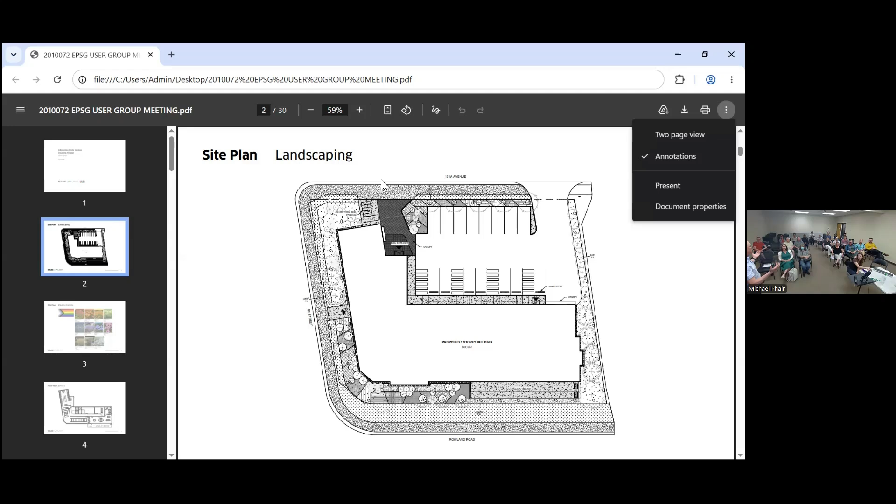If you complete control, right, and maybe I'll introduce Tegan from our office. For those that don't know me, Jonathan Rockliff, I'm with DIALOG, I'm a registered architect, and I've got Tegan, designer today. She's been heavily involved in producing a lot of the design work, and I've got Ty here as well, who's a partner in charge for the project. So I think between the three of us, we can answer probably any questions you might have.

So what we're looking at first is the current site plan, which has the footprint of the building. As people know, we've got roads on three sides. It's kind of a unique site that way.

We did find out recently that we fall within the corridors area, which has some additional landscaping requirements that we're kind of stick handling right now with the city. The idea is, do we have a colored landscape plan coming up? We don't have a colored plan, but we have some images of the planting scheme.

Quickly, in terms of the site plan, the building is kind of this L shape. We've got the main entrance facing 101A Avenue. We've got limited parking, but some parking to the north. And I think everybody knows, and we'll see it later in the design, the site is quite sloped.

So as you go from the north to the south, how many meters difference? 2 meters, I think, a little. So that's 7 feet or so from front to back. So let's go to the next slide.

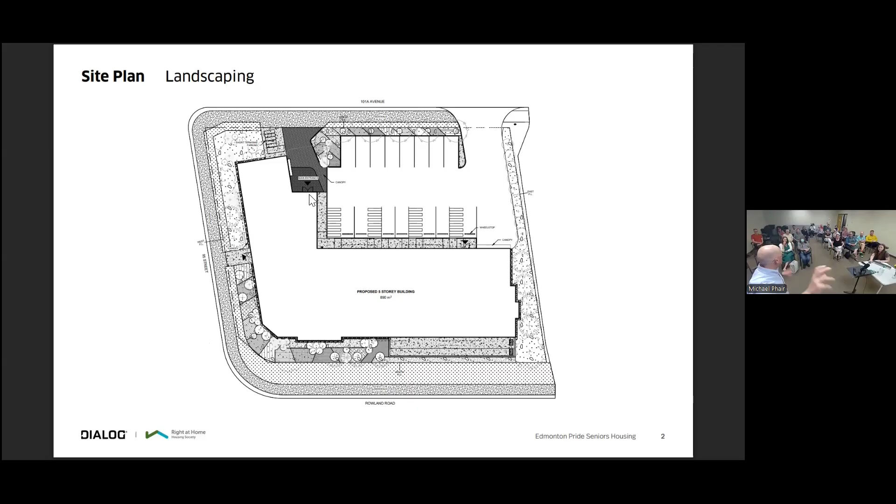I'll point, and maybe you can hover your finger for the people online, but we've got the main entrance into the building, a bit of an entrance plaza where we thought we'd get some seating in there and some planting. We've got some bicycle parking, which is a requirement by the city, adjacent to the front entrance.

As you come around the building, it's hard to see, but there's bigger trees and bushes, and some landscape buffer between the streets and the building of different shapes and sizes. We've got a fire exit here along 95th Street, and it'll come out probably in a drawing later, but there's an outdoor amenity area just to the south in the lower level, to the southeast of the property.

Will the development permit dictate the landscaping? The zoning dictates the landscaping, so there's a requirement for trees and number of trees, but they won't say exactly what needs to be planted. I don't believe they indicate the species, but they might say like this many coniferous trees or deciduous trees.

Our landscape plan that will be submitted to the city as part of the development permit will be our opportunity to propose how many of what will be planted where, and then that becomes what we get the permit on, so they'll come back and look for it. We do it all the time.

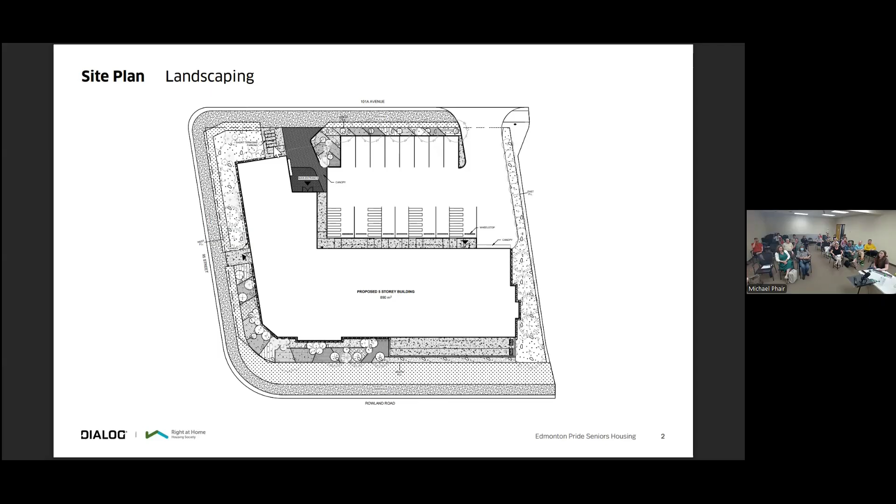So that's the building footprint and the site plan, and we talked about the landscaping.

We're calling this the lower level, not the basement, because of the slope of the site we have a walkout basement. For the most part everything's underground, except the area we're calling the common amenity area, which is essentially a big multi-purpose room with a kitchenette, some bathrooms, storage, and a sizable exterior space directly accessible from it. It faces south, so lots of sun.

We're aware it's going to be adjacent to a busy road, so we've thought about fencing for security, but also privacy.

Is that your bike parking? Yes, this space up here is dedicated to bike parking. You can see all the little stalls required for smaller bikes and bigger bikes, and this is in order to meet the zoning requirements.

Common on each floor is two elevators and a bit of a lobby space, and you'll see more about how that works as you get above the main floor. We've got a large storage area over here, some mechanical and electrical spaces in the middle, and a couple of exit stairs.

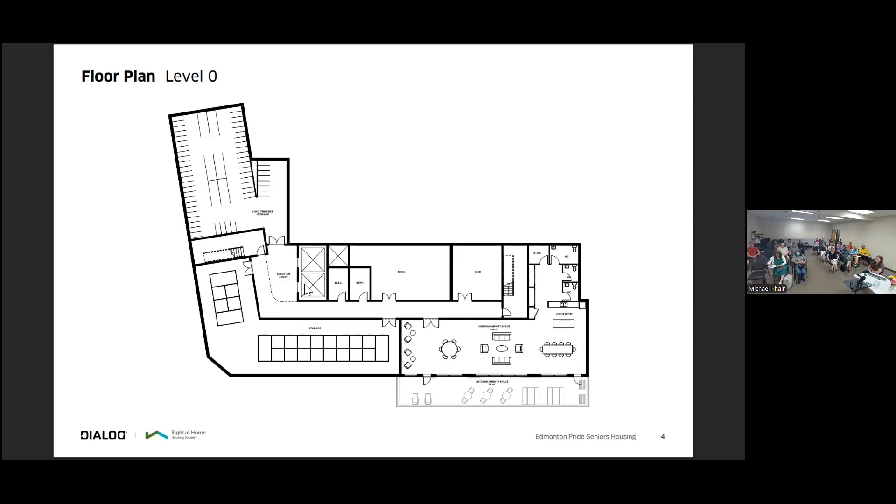All right, next level. So this is... did someone online have a question?

How does one see the slides? I'm not seeing them at all. Oh, it's...

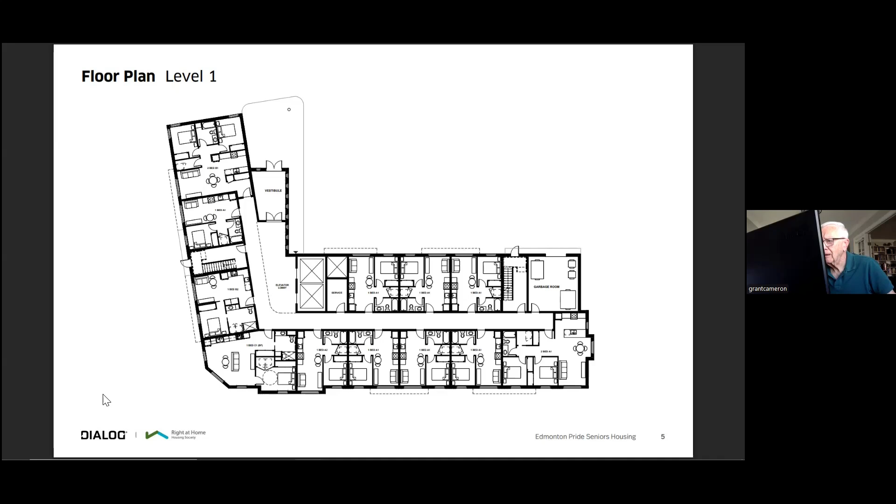Anyone else online? Yeah, we can see them, they're on the screen. If you go to speaker view, you'll be able to see it, then go full screen. Okay, where is that? It looks like a little stack of nine squares. Speaker view, are you seeing all of us right now? I'm seeing the whole room. At least I was. You should, but they shared this screen. Yeah.

All right, well, maybe I'll keep going while you're figuring out your tech, if that's okay. Okay.

I don't know if we want to share these drawings after the meeting, but I guess we're okay with that. I think we're fine sharing some generic ones as long as everyone understands we still haven't made it through development permit and building permit, so there may be changes as they identify issues. They're your guys' kind of drawings, but just so we understand, we may have to make tweaks along the way. It'll give you the general idea of what we're aiming for.

Here we've got the main floor, and the main entrance coming in from the north. There's a nice size canopy over the front entrance for shelter, and we've pretty much used every square possible inch of the space available to create suites, mostly suites. Maybe just hover your mouse.

One of the requirements from the city was a garbage room, not exterior garbage. So in the northeast part of the building, we've got a garbage room. On garbage day, the truck will pull up, open the door, pull the bins out, empty them, put them back in. I think Right at Home is actually happy about that, from a safety, security, maintenance point of view as well.

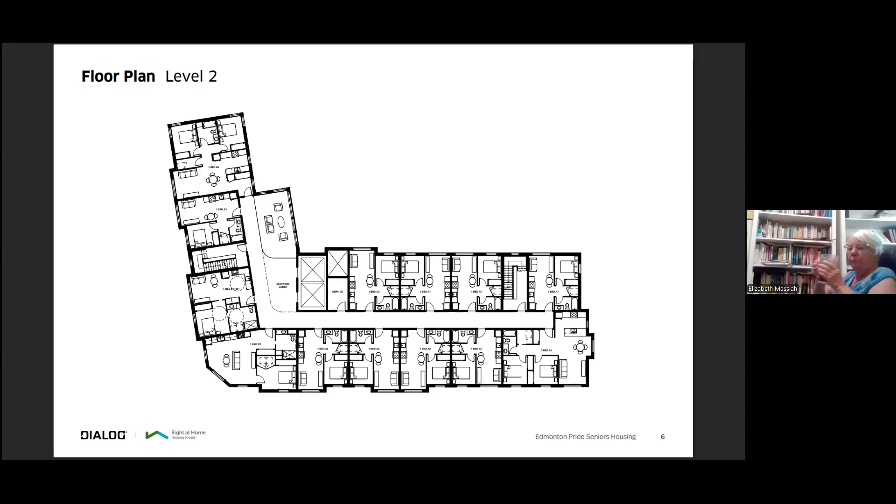On the upper floors, the elevators are a place where people come and go in and out of the building. The lounge area has a nice adjacency to that space, so it'll be an interesting, active space, with windows bringing natural light not just to the lounge but into the core of the building where the elevators are.

When we look at the exterior of the building, you'll see we've extended out portions of it. That provides a bit more space for the suites, and in some cases we needed that extra space, but it also helps create some visual interest on the exterior of the building.

So do they have balconies? No balconies, no.

So I guess we can probably go to the exterior. Jonathan, the size of the different units, how big are they, the one bedroom and the two bedroom? We'll hit that on an upcoming slide.

On the topic of balconies, one of the things we considered in this design was larger lobby areas and community spaces, encouraging people to get out of their suites where we've got those sitting spaces.

Balconies, especially if anybody's watched the weather lately, can be not a fantastic space to use. Summer we have all this rain, winter it snows, it's cold. So creating these shared spaces, whether on every floor or the main one in the basement, means it's usable 365 days a year, no matter the weather.

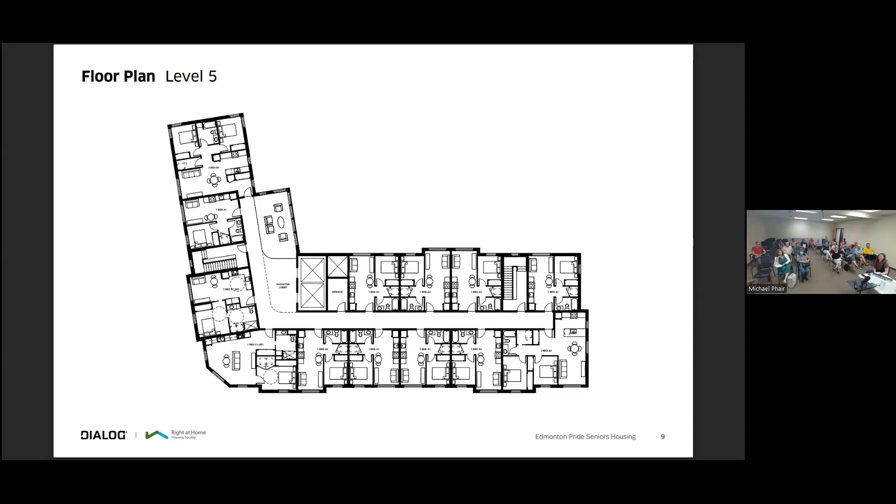For those challenged converting meters squared to feet squared, if you add a zero on the end you get pretty close. So this would be about 400 square feet for this suite. That is one of the smaller 1-bedrooms. This one's a little bit bigger because it's got that bumping out on the exterior to add a little bit more space to the living area.

Because we're getting money from the government, there's a requirement in the building code to provide adaptable dwelling units, kind of like barrier-free suites, but they don't have to be built barrier-free, they just have to have that ability to become barrier-free if needed. So we do have 7 of them in the building.

This would be an example of one of them, showing those dotted circles, which are the turning radius of a wheelchair, for reference and size. I think that's 1,700 millimeters - just over, no, just under 6 feet. It gets bigger every year, the radius we have to provide. It used to be 5 feet, now it's more. There is laundry facilities in every suite.

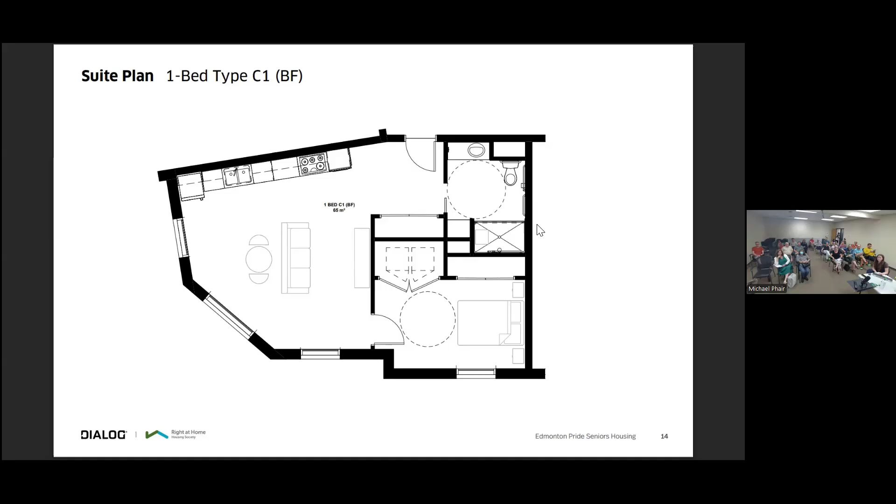And what was the square footage of this one? This one is 65 meters squared, so approximately 650, 675 square feet. And yeah, there's a nice big closet as you come in, right there. Same layout.

Here's our two-bedroom. It's in the southeast part of the building, so it benefits from two exterior walls and lots of light. This one has a storage room where we would put the stacked washer dryer.

Do any of those windows open? Yes, yes, albeit the building code limits it to 4 inches of actual opening space. They could be sliders, right? They could be sliders, they could be swinging, but can't have more than 4 inches of open space. You don't want anyone to fall out. Yeah, it's kind of like that.

We are putting air conditioning in the building though. Oh, perfect, so you're not reliant on your windows for cool air. That's nice, I was like, I don't think you're super worried. That would be if you could climb out that window later.

Air conditioning in the building. In the suites as well, or just the hallways and common areas? We are still value engineering the mechanical, but it will be. We are working towards making it nicely acclimatized for folks.

Excellent. Sorry, and what's the square footage on this one? This is 72, so about 720. And how many of those units are we going to have? We have 5.

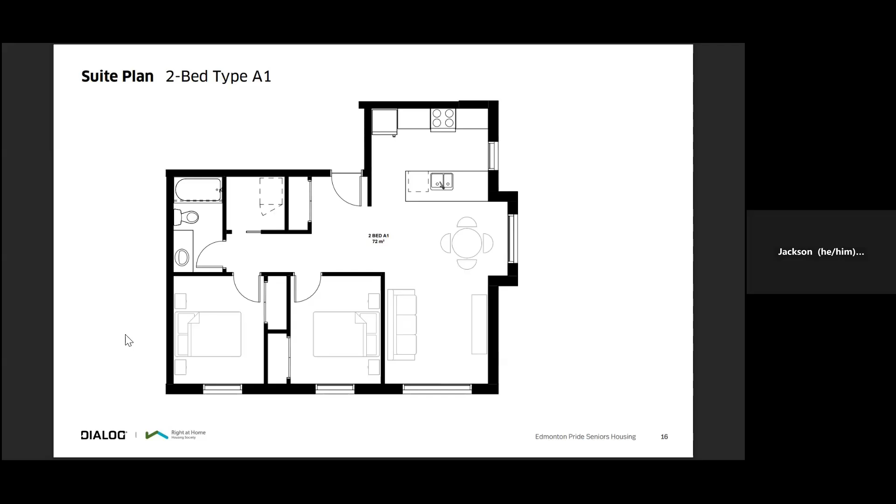Yeah, no, that's a really good point. We have not gotten to the level of choosing the appliances yet, but just something to keep in mind. Because, for sure, not to call out Michael, but Michael's not the tallest person in the room. And especially because common injuries are like shoulder injuries or hip injuries, so the clearance of being able to pull stuff out of the dryer would render a stacking washer dryer useless if you can't reach it. That's great feedback, we'll make note of that for when we start to select the appliances.

Thank you. I guess on that note, I think all the suites have dishwashers. Yeah, that's common, all suites have a dishwasher. Wine coolers?

Sounding like one of those little juice box style wines.

Marisa, would you be able to touch on it all?

I think one of the things is we've tried to provide a range of unit sizes and unit types here, and they go from very compact to larger, more market-type sizes. I don't know if you'd be a good person to expand on the relationship between affordability and square footage a little bit.

Well, there are 1.5 million reasons that we try to come up with a mix, but at the end of the day, when we're applying for grant funding, there are caps on the dollar per square foot, the dollar per unit, and the dollar per build. So we do need to be cognizant of that when the province is funding affordable housing. They're maybe not funding executive suites — that's not always what they're looking for.

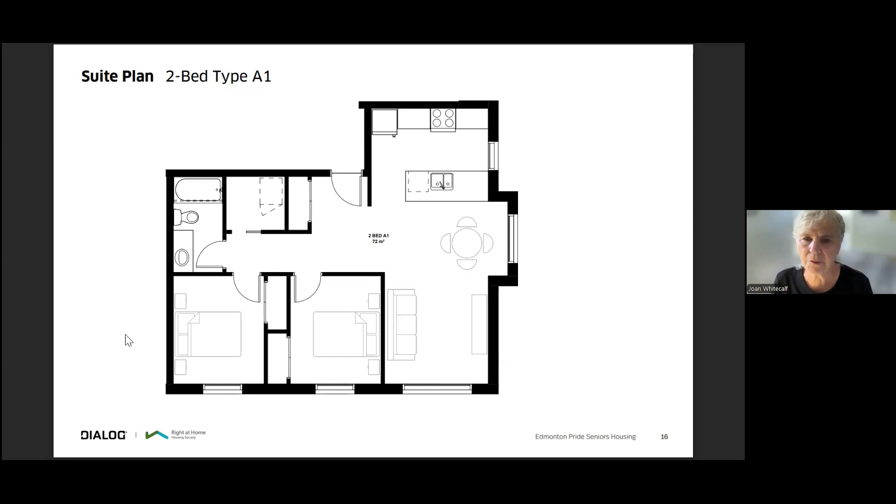We have strategically placed a few of them where we thought it would be helpful for space. In all the suites, or depends just on some? In this design, like the one that's up now, you can see there's a pocket door on the laundry room, I think in the barrier-free suite. The barrier free has them. In bathrooms, we find that people really, really don't want a pocket or a sliding door, for privacy, because you hear absolutely everything. And in bedrooms, folks tend to prefer those as well, but we have placed a few.

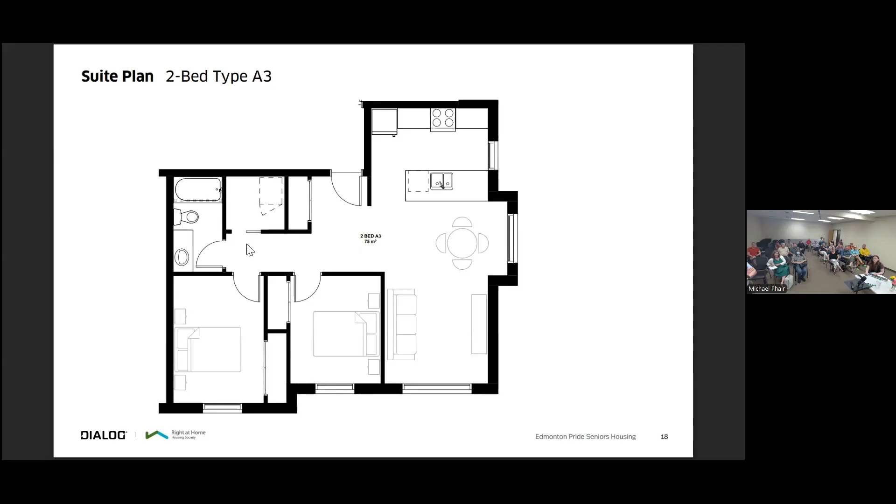So yeah, just some minor differences here because of the bump outs.

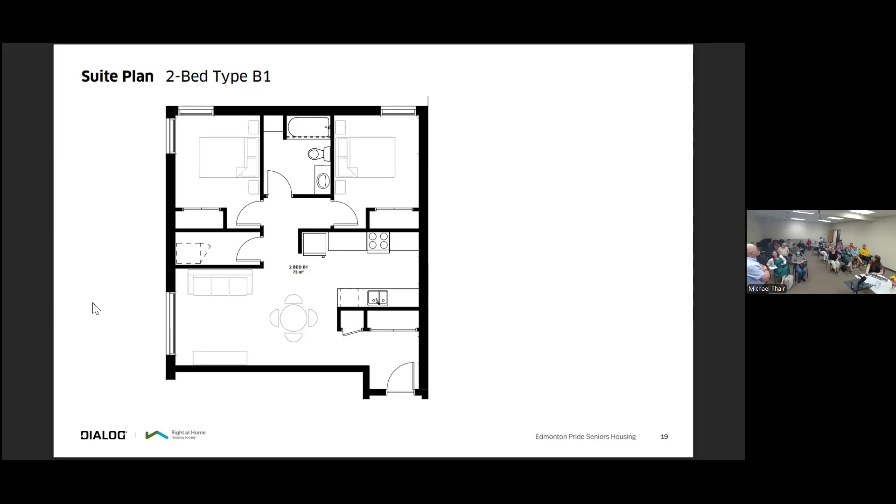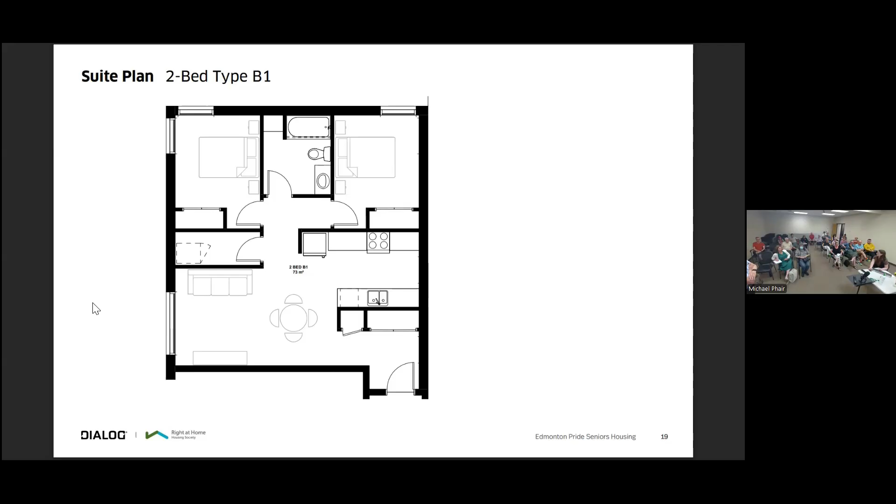Yeah, this is another one of the 2-bedroom units. This is sort of at that top end, the most northwest part of the building. So a different layout to the other 2-bedroom.

Can you go to the rooftop? It's just a roof, there's no top. Waste - just a waste of this beautiful piece of land that has views in every direction. I know, I know, awful. We are thinking very much about the cost of construction, and yeah, I hear you.

Is it possible to create it now so that later on you could turn it into something, like create the structure? Because you've got to have your mechanical up there, right? Our mechanical is in the basement. I think it is something we've done before where usually the problem is not structural, it's usually just that there's a cost associated with coming in and having - you'll need to put a patio paver kind of system on pedestals or something that doesn't damage the roof membrane. But given that it's a flat roof, I think that's something that could be done in the future. It's quite costly at this grant stage - if we were to go to the government and say give us money for a beautiful roof deck, it's thousands of dollars per square foot, so it would be hard to get the funding lined up now to do that. But I think it's certainly something that could be added in future if funds are available.

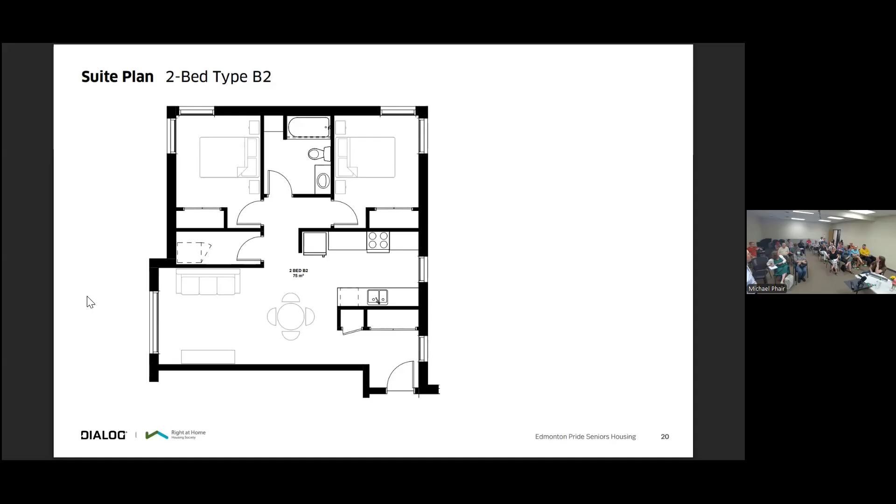Will the ownership of the building and the property be not-for-profit? The ownership of the building will be shared between Right at Home Housing and Edmonton Pride Seniors Group, and we're both nonprofit.

Okay, so that opens up the possibility of casino funding for future renovations. Yeah, we already do casinos for Right at Home Housing. You guys have gone to the ends of the earth. I did more casinos than you could possibly imagine. Yeah, I'll be at Sage's Casino, in case anybody plans on joining me.

One of the things was, and I can safely say originally, we had a passion and a hope to have a rooftop patio. Unfortunately, when we had to shrink and change the building to meet all of the permitting, bylawing, and zoning, we needed to put housing there instead. But to wrap that piece up, it isn't impossible to think of it as a future possibility.

I think the one limiting factor is getting to the roof, which means elevators and stairs, so that would mean extending those up. Elevators would be hard to do, stairs would be better and easier to do. Elevators, not so easily, especially in 40 below, that's just not doable. You'd kind of build part of that roof as an interior space, sort of how it would work if you put the elevator up there.

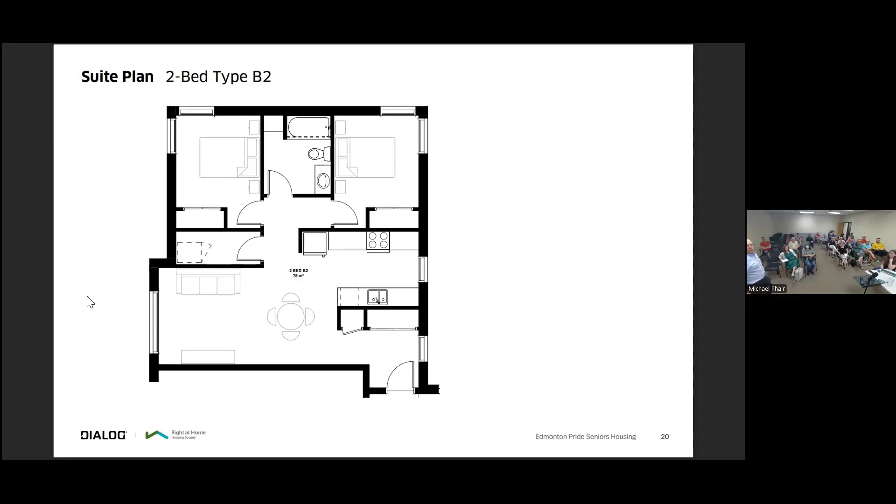Maybe, I think we've done all the suites, right? Yep, that's all of them.

So a little caveat before we look at the elevations: these are a work in progress. We've been rushing to get something put together for our development permit application. Our intent is to submit this for the development permit, but then come back to look at it more. I think the materials are close to what we want to use, but maybe just some of the colors and detailing and exterior expression around color, and how we might want to do that. So that will come, but right now we're just trying to get it in for the development permit. So yeah, Tegan, if you want to just show where some of the materials we're thinking of.

Sure, and you can kind of see some of the elements where we bumped out the building to provide a bit of a visual break on it being just a box. We also have to go through an extra hoop when it comes to getting a development permit: we have to go to a group called the Edmonton Design Committee, because it falls within their purview in this part of the city. So they will have expectations above and beyond your typical development in terms of urban design. Do you have a question?

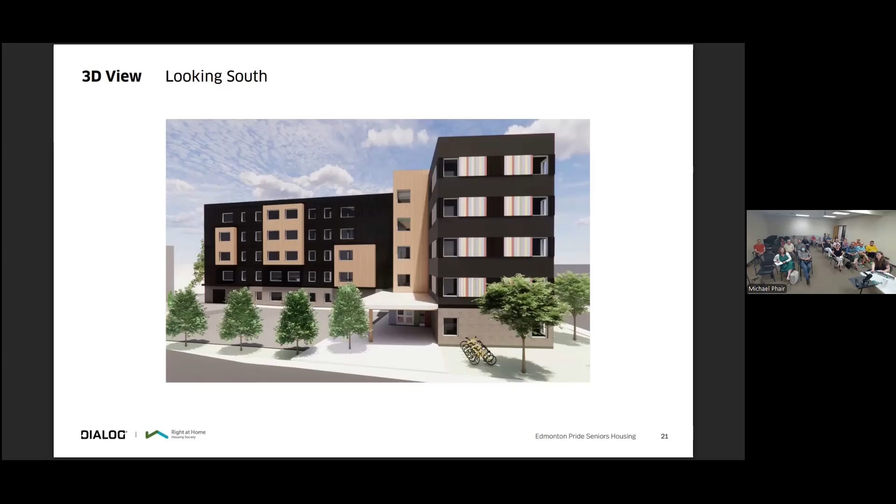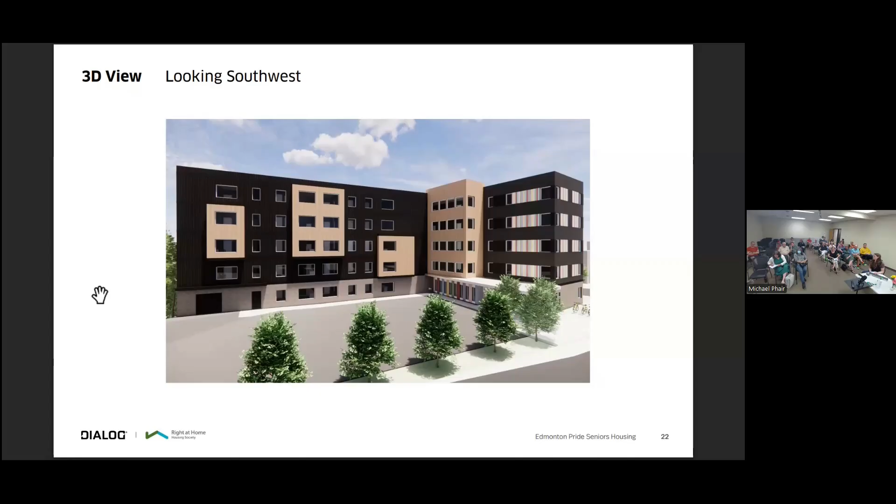So I was just wondering about the flow of people around the building and what the consideration is for that part of the L, where people might want to find a private space away from the busy street and police, I'm assuming you mean people who don't live there. Yeah, or where they might look for a place where they're not visible, to camp out or whatever. Is that why the entrance is in that crux of the L? Yeah, definitely thinking about keeping or limiting or eliminating spaces where people might come where we don't want them to. When we're thinking about the landscaping, that's definitely a consideration. This has 3 public faces, so I think that will help with eyes on the street, the views of people inside the building seeing what's going on outside, to also be part of that solution.

That's 101A Avenue there, so I can help a little if you want.

We talked a lot about this building and took that into consideration, so that big gray square area is your parking. Depending on people moving around, you're gonna see a lot of coming and going through what appears to be a vacant courtyard, but it's actually the parking.

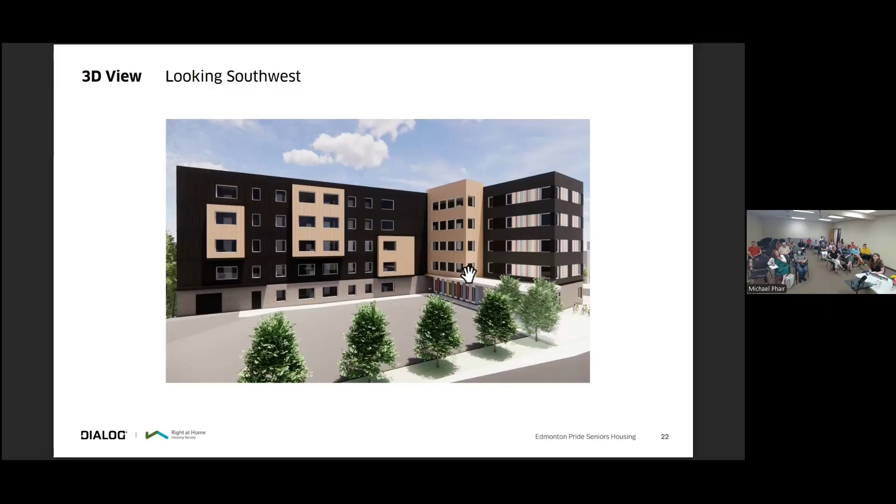Even at the ground level - that's not the basement or the lower level where the bike parking is, that's actually apartments on that level - you've got people there who are going to hear noise or see movement or that kind of thing. And we'll do some hopefully really nice lighting in that area too.

Does that answer things? Okay, oh, got another hand online. Joan, you've got a question?

Yeah, I'm just wondering about the cladding. I just watched this documentary where a building burnt down in England years ago, and the problem was with the cladding - they were saying it was what was in between the cladding, some super melty thing that went crazy when the fire happened. So I'm just curious, it's in my head, the cladding. I'm just wondering if there's any fire safety concern.

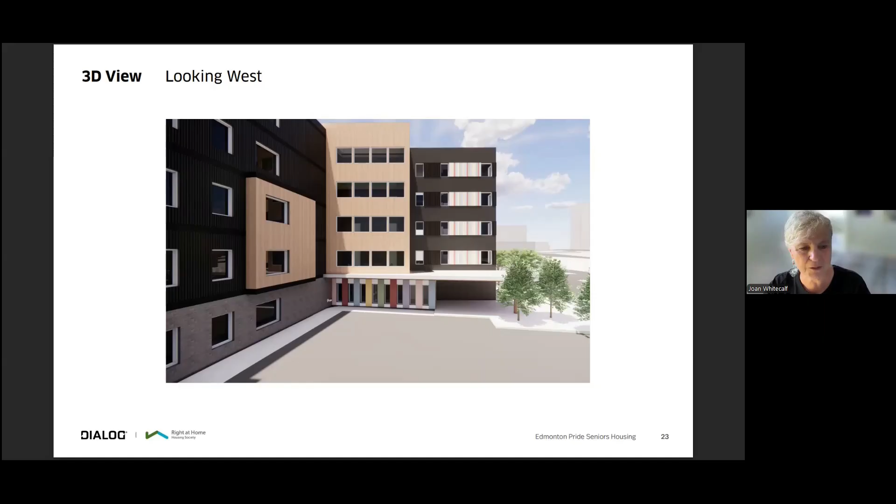Yeah, no, you won't have to worry about that. Okay, that's good, because it was horrible. Thank you, it was horrible.

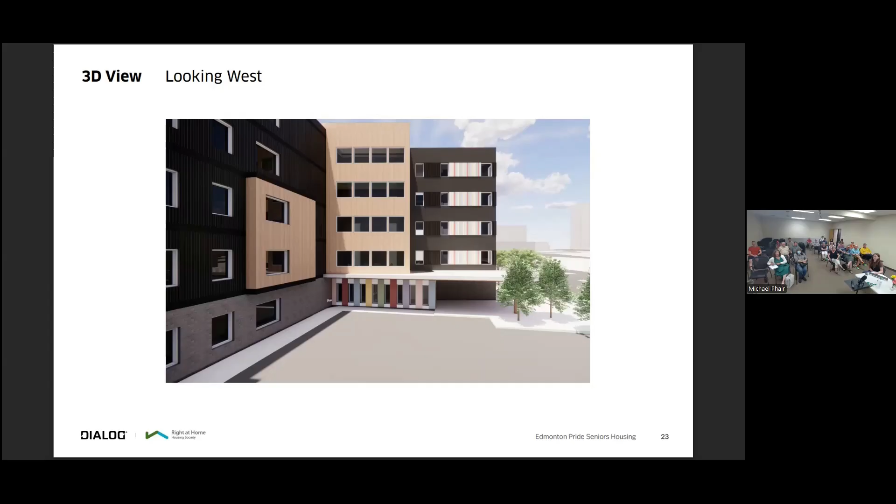Yeah, good, sorry, we're gonna move cognizant of time, but it's nice from that side. These are good views here, just to show how the site slopes, and we haven't shown enough detail of that common amenity space, but it will be fenced in so it's secure, so people from the outside can't take furniture away or find a way into the building. More detail on that is to come.

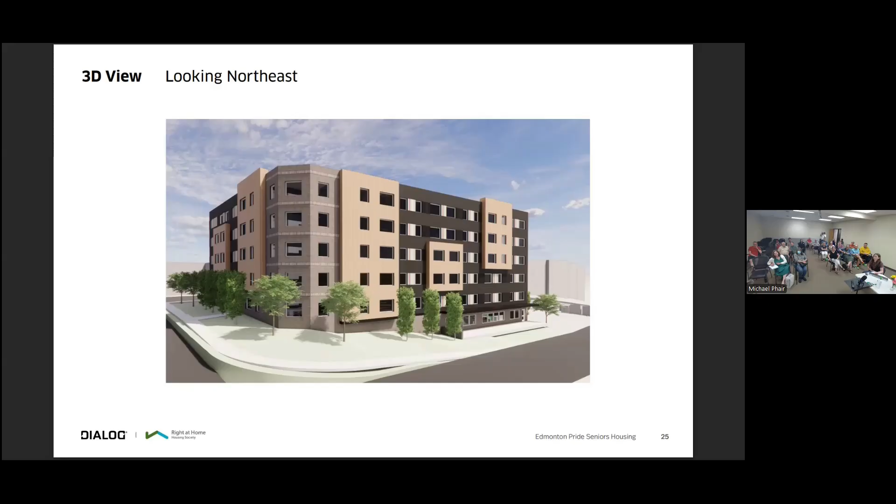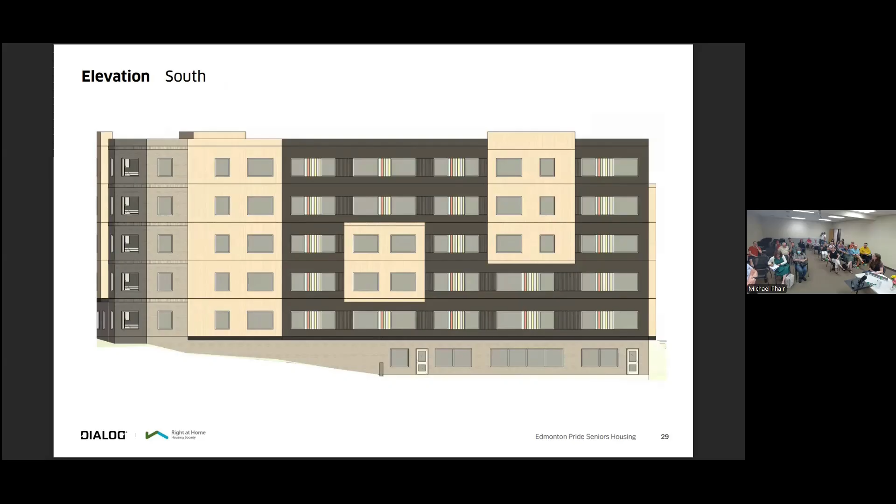Okay, these are just the elevations. Can you tell me what elevation on our building would be where the arts co-op is? That would be to the east of our building? How many stories?

They're townhouse style, are they not? Yeah, they're townhouse style, but their backyards are really sloped. I'm just wondering where you'd have a clear view, what floor you'd need to be on in our building. I mean, it would probably be around the 3rd floor and up that you would see over top.

Yeah, and in every direction. Well, I guess I can't remember what's to the north - there's some taller buildings. To the north is the Hecla. But the Hecla's kind of on that one corner, and I believe when we did some renderings, there should be a bit of a north view. It should be - don't quote me on that, I spent a lot of time looking at things.

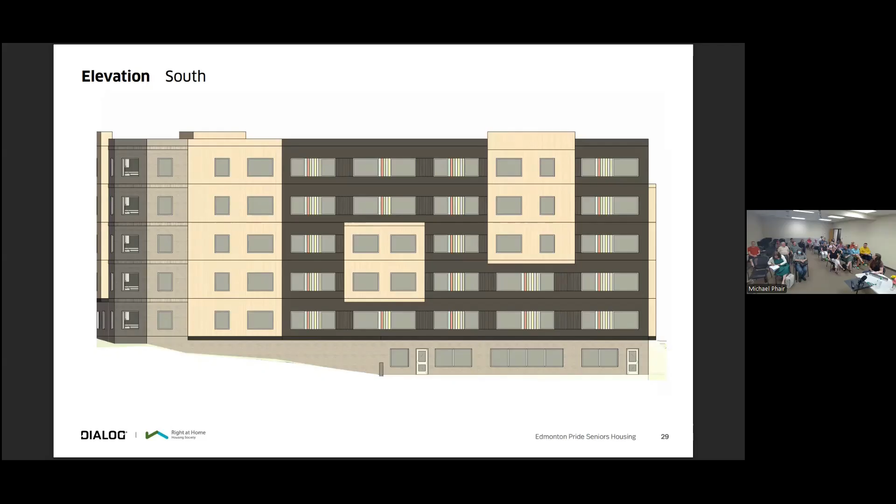And then west is a building of condos. South of you is fairly short - that pinky orange area, they're quite short. You're talking about the Arts Collab apartment building, it's at the end of the block. Yeah, I think there's a space in between - almost a half block down. Yeah, I know people who live there.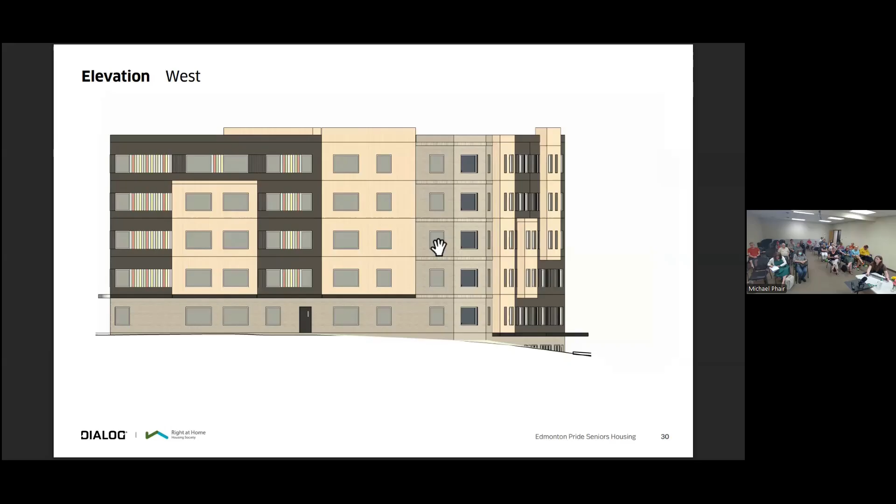Do you need us to stay for any of the other parts of the meeting? Somebody has to run that. Did you drive together? I can stick around and help if they need a hand. I think we can figure it out since you don't have a PowerPoint. I do not have one, but Patrick does, for the camp. I think they're all on the desktop already. Has yours been put on?